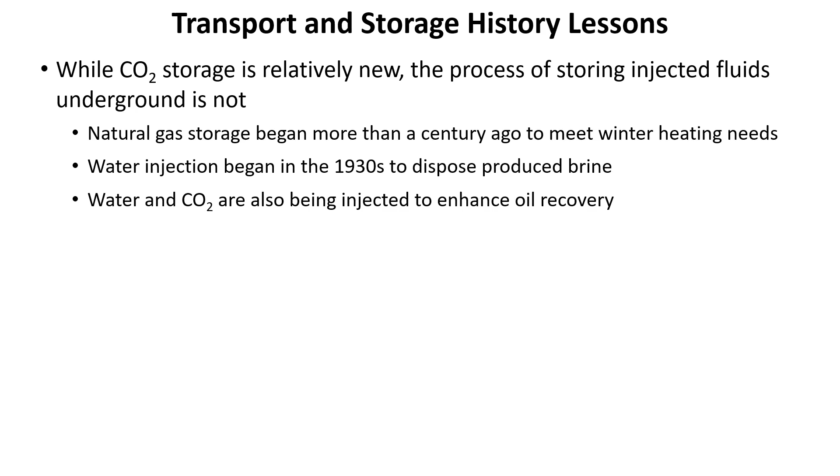While CO2 storage is relatively new, the process of storing injected fluids underground is not. Natural gas storage began more than a century ago to meet our winter heating needs, and then water injection began in the 1930s to dispose of produced water. And then we started waterflooding in the 1940s and 50s, and by the time we get to the 60s and 70s, we're injecting CO2 for enhanced oil recovery.

The history of those injection operations provides considerable insights into the types and frequencies of failure incidents. And while most are facility or wellbore related, there are a small but significant number that have to do with geological failures, generally on the order of 5% or so. And CO2 storage is susceptible to these same sorts of failures. And as we heard in the last panel session, so is hydrogen. In fact, perhaps even more so because it's less dense, less viscous, and a smaller molecular size than CO2.

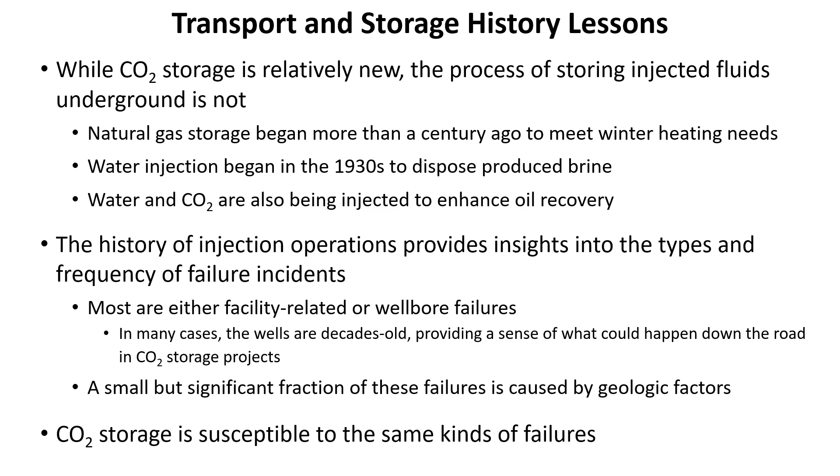And just to give us a sense of what sorts of mechanisms might be responsible for CO2 leakage, let's have a look at this diagram. You can see on the left-hand side there's a well with a red bar that goes down to the bottom, and that well penetrates limestone at the base, that's in blue, and yellow sandstone above that. And as we inject the CO2, what we find in that limestone is that the limestone grades into impermeable anhydrite to the right, and so that makes the reservoir much smaller than they thought it would be, and so it pressures up, creates fractures which breach the seal, and then that gas also moves down the faults and creates seismicity, earthquakes.

In the sandstone where the gas is being injected, or CO2 if it's supercritical, that CO2 can move through the sands and up the fractures. It could also move into more permeable pathways. It could move into old wellbores and find its way to the surface. And it may not come all the way to the surface. It may exit in shallow groundwater aquifers. So this is a nice little diagram that shows us some of these pathways of CO2 leakage that we need to consider.

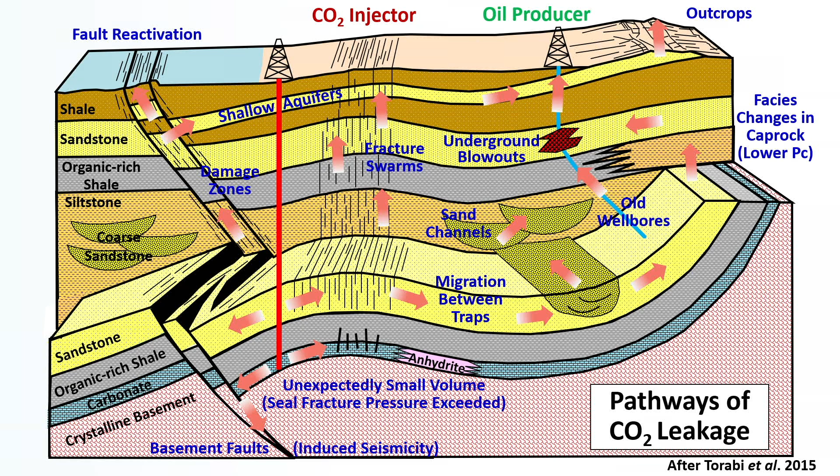When we think about risking these projects, these subsurface projects, for the chance that you'll have leakage in these different ways, we like to reference the Storage Resources Management System, which is commonly used and was developed by the Society of Petroleum Engineers along with some sister societies.

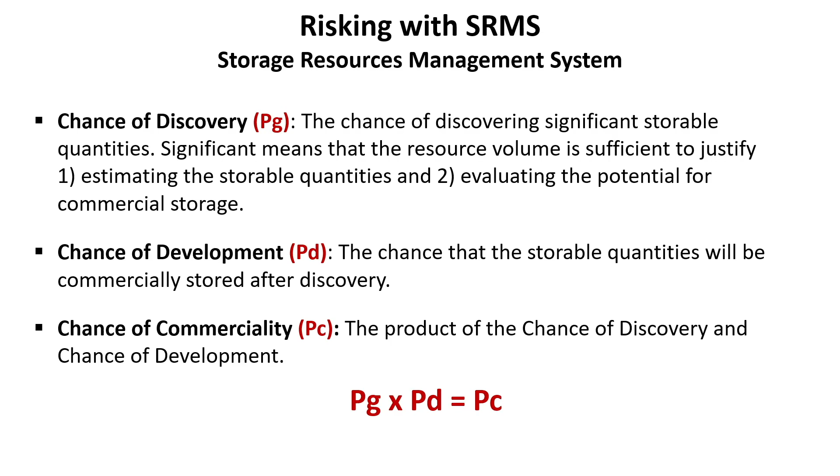And in the SRMS, we define the chance of discovery as the chance of encountering significant storable quantities in which we can put the CO2. The chance of development is the chance that those storable quantities will be commercially stored after discovery. And the product of those two is what we refer to as the chance of commerciality, using terminology from the SRMS. And if we want to estimate P sub G, the chance of discovery, and P sub D, the chance of development, we can do so with independent chance factors.

So P sub G can be estimated by considering reservoir, injectivity, containment, and trap. And you can see the key characteristics that we're looking to quantify when we do so. For each of those independent chance factors, we'll look at the subcomponents, we'll assign a value of between 0 and 1 to each of those, and then the product of those becomes P sub G. So if we thought there was a 90% chance of each of those four, we would multiply those together, and we would have a P sub G of 66%.

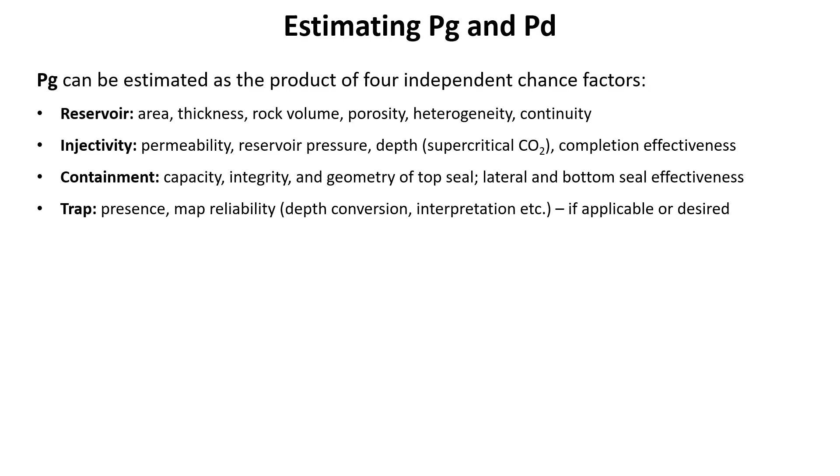Similarly, we will do something like that for the chance of development success. And again, this would be applied after you have the discovery. There's the chance that your plan is going to be technically mature and executable, that you're going to be able to inject longer term at rates that can put away the contracted volume, and that your facilities are in place and that you are in compliance. And again, we assign values of 0 to 1 to each of these, multiply them together, and the product becomes P sub D.

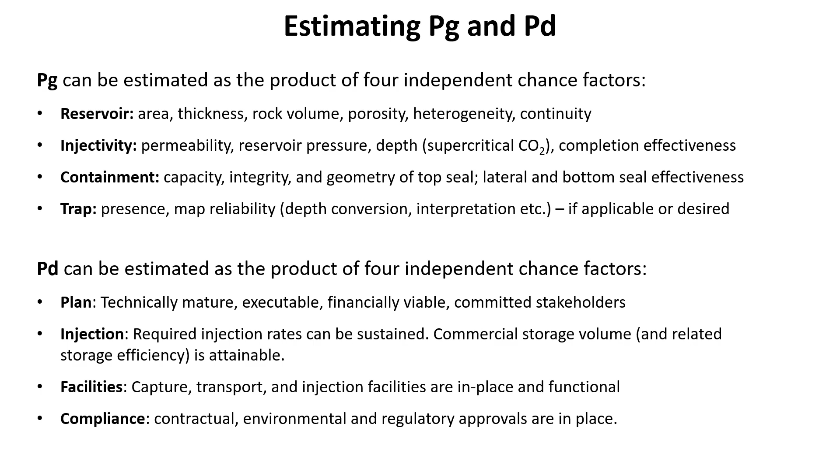And in addition to thinking about P sub G and P sub D in this way, which is consistent with the storage resources management system, we can think about P sub G and P sub D in terms of current and future risks. So for P sub G, we would call that a current risk because we can go out there and we can quantify whether or not we have a discovery by drilling a well. We'll log the well, we'll take some core, we'll do an injectivity test, and if we're able to convince ourselves that we then have the potential for commercial success, we can go ahead and inject longer term, see if we can store those quantities that we have contracted, and then also ensure over time that we can maintain the ability to inject through following regulatory rules and having a social contract with the public.

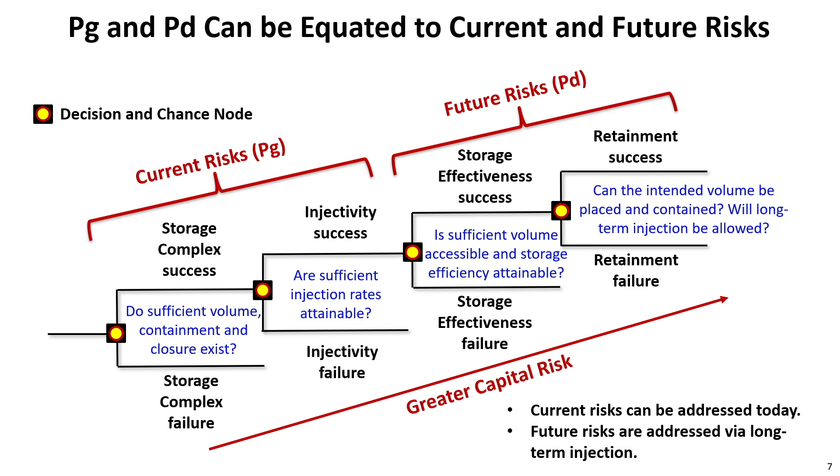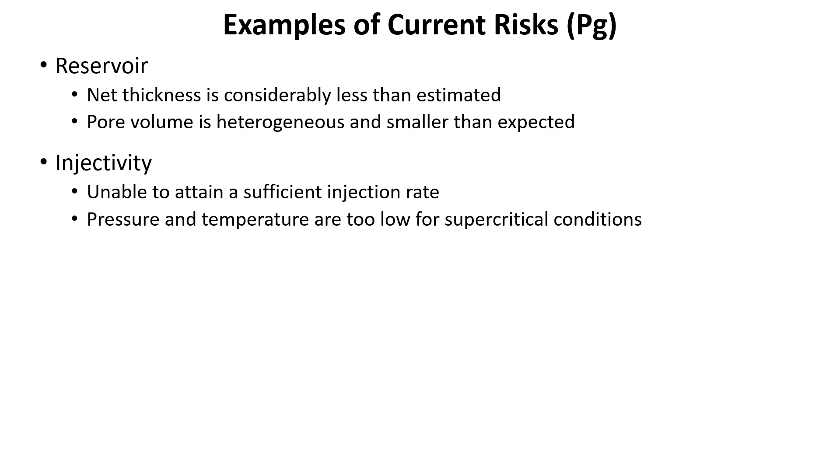Now, to talk a little bit more about these current and future risks, let's look at some examples here of current risks under each of these subcomponents. Reservoir risk, for example, might be that your thickness isn't sufficient or that your pore volume is smaller than expected. Your injectivity means that you're unable to attain a sufficient injection rate, or perhaps your pressure and temperature are too low for the supercritical conditions you need to store the contracted mass.

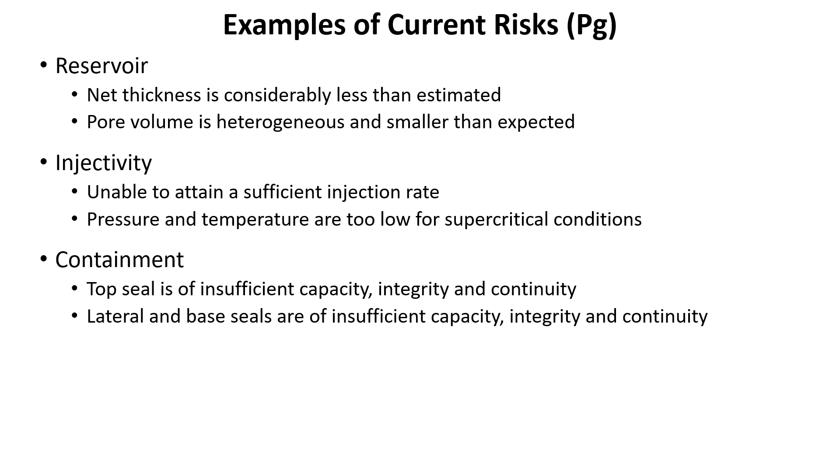You want sufficient containment, which means top seals, lateral and base seals that exhibit capacity, integrity, and continuity. And then finally, if you have a trap, you need to understand what the size of the trap is, whether it's big enough, and whether you have compartmentalization within the trap. So these are some examples of these independent chance factors that we would have to think about when risking this for P sub G.

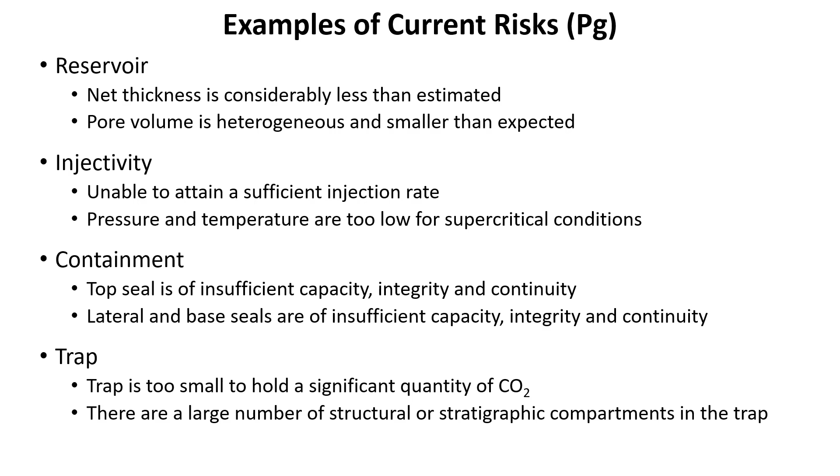And an example of a project that actually failed to get past the current risk stage, we could consider the ZeroGen project in Australia, where, as you can see here, they had at least 4 tests of the interval of interest. And each of those tests have a KH value, that's permeability thickness, which is a proxy for injectivity, that were somewhere between about 6 and 30% of what was estimated from core plugs. So that's too low to have a chance of commercial success. And therefore, this project fails, Pg is not one, and you exit from the project.

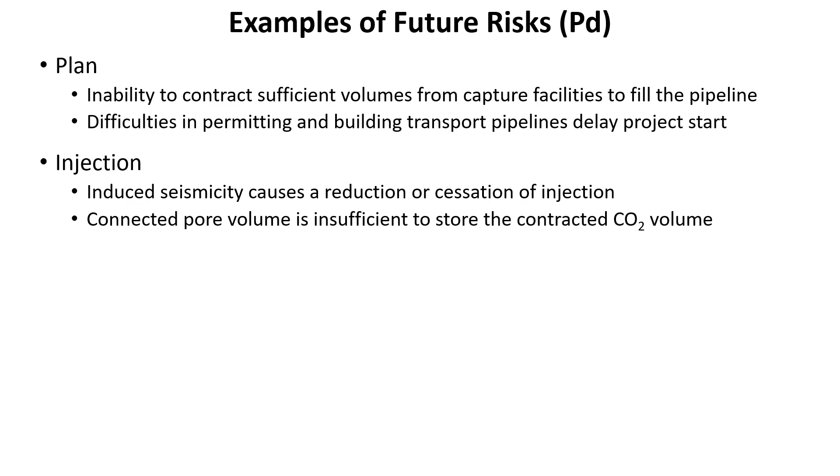If we talk about examples of future risks, so this is the chance of development, for our plan, the inability to contract sufficient volumes or difficulties in permitting and building the transport pipelines would mean that you have a failure of the plan. For the injection component here, induced seismicity could cause a cessation of injection, and you may not have sufficient volume to actually store that CO2 that you inject.

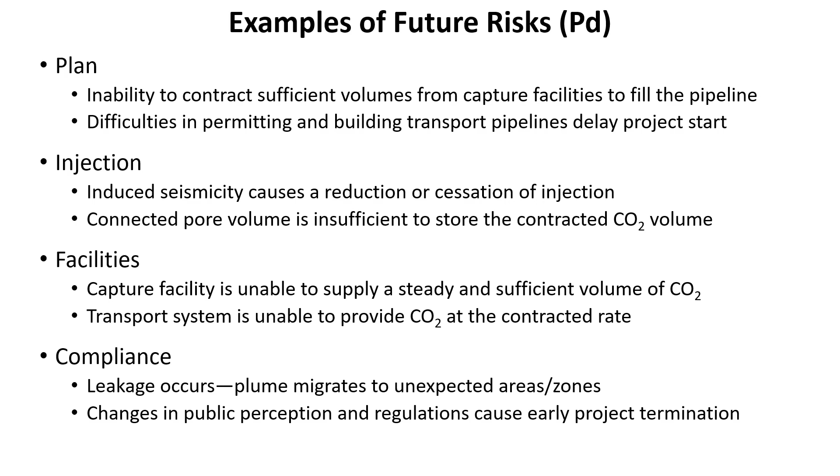For the facilities, you may not be able to supply that steady and sufficient volume of CO2 that you need at the contracted rate. And in terms of compliance, perhaps you have leakage or the plume migrates somewhere it's not supposed to, changing the public perception and causing the regulators to pull your permit. So these are the sorts of things we worry about after we have a geologic success and we're trying to assess the chance of development.

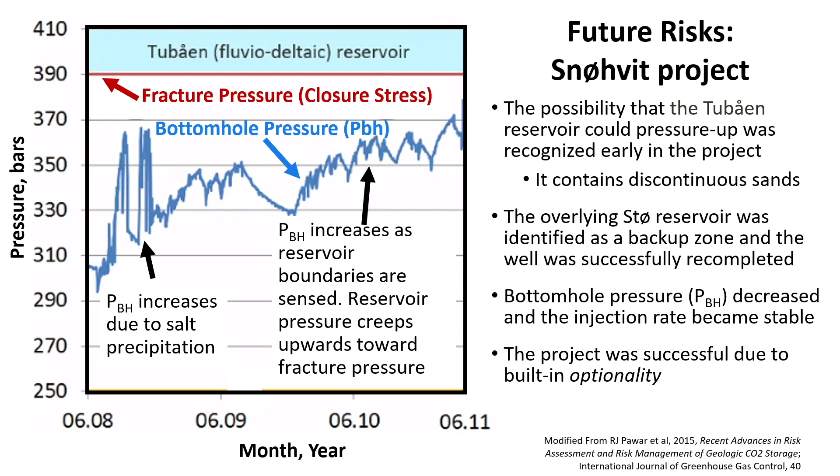So as it got close to the red line there, they recompleted the well into the overlying Stø Reservoir, which had previously been identified as a backup zone, successfully recompleted it, decreased the bottom hole pressure, and the project was successful and could continue with development. And it was successful due to built-in optionality. And that's an important term to understand because we want in our projects to have optionality, things that we can do if we have potential for failure. And this is a good example of that.

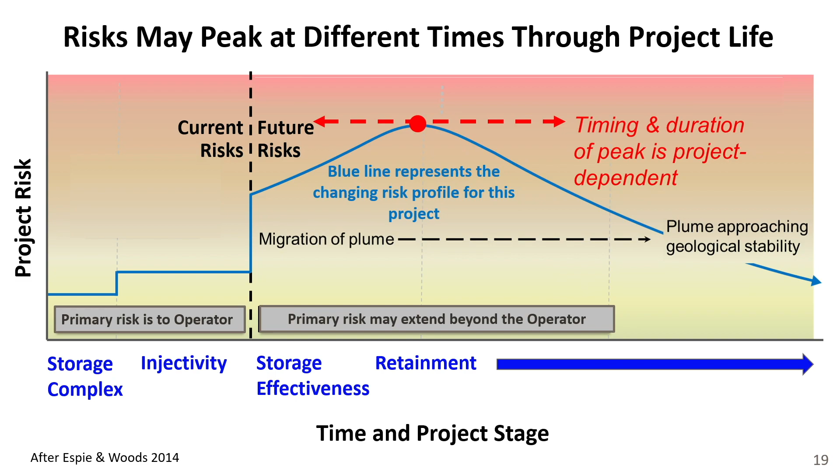But during that period, it is possible for that CO2 to migrate somewhere it's not supposed to. So there could be a peak risk later on in the project past the point at which you finish injecting. So this points to the fact that we have various times along the project length in which we may have these different peak risks, and we need to be able to identify them, anticipate them, and mitigate against them. And that's what we're going to talk about now. We're going to talk about a couple of the ways we can reduce risk.

I have a list here we'll go through very quickly. These are some of the ways in our company we try to help clients reduce risk. And those include framing sessions where we can identify key uncertainties, risks, and mitigation options. Quantifying the value of information we need to gather to understand these reservoirs. Building a library of analogs, including proposed projects for which a lot of data may have been obtained.

Building models of sufficient complexity to assess risks and actually running failure cases so that we understand under what circumstances the project could fail. Using the staged approach, which I talked about a few minutes ago. Determining that range of possible outcomes and keeping your ranges wide, particularly if you don't have a lot of information. Effectively communicating your intentions and keeping everyone on board. Recognizing and mitigating your biases.

As human beings, we are plagued by bias, particularly things like overconfidence, which cause us to narrow the range of possible outcomes, and overoptimism, which causes us to choose a high value within that narrow range. And then there's also other biases, including the confirmation bias, where we collect and interpret data in a way that confirms our beliefs, or the motivational bias, which leads us to act in ways based on our personal desire for a given outcome.

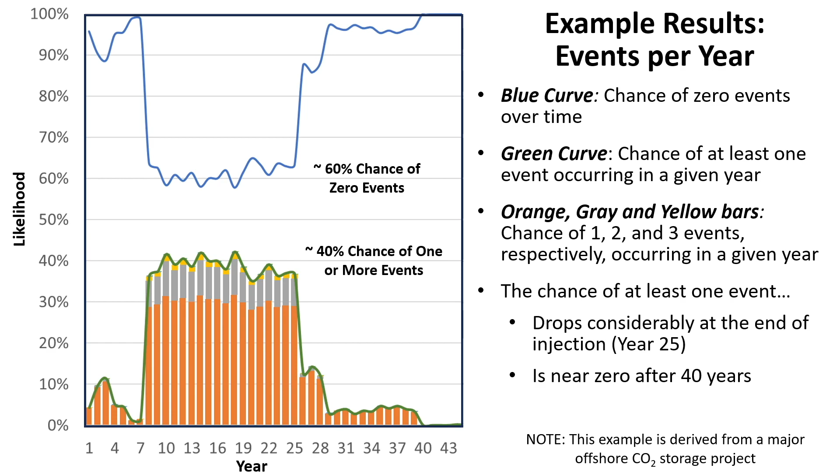So this is the idea, to try to give people a sense of when these events might occur, what might be the financial impact associated with them, so it is on their radar. And some of these you'll want to mitigate, others it's pretty difficult to mitigate for a 1 in 1,000 year event, but at least you should understand that it's possible.

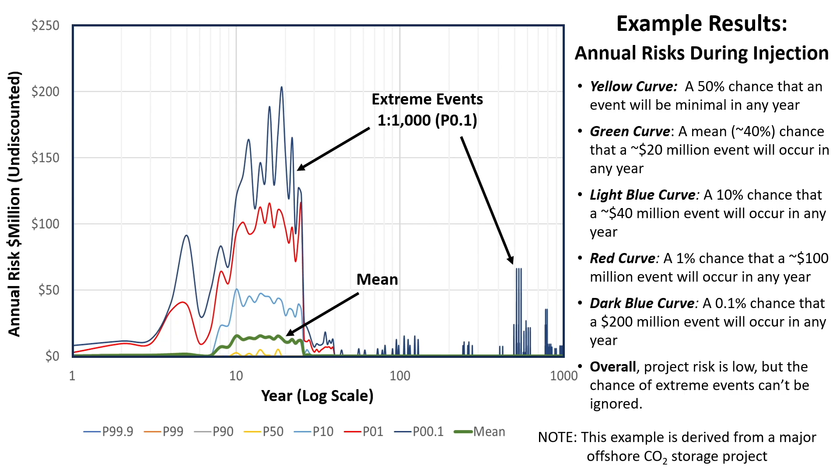Okay, to summarize then, CO2 transport and storage are susceptible to multiple risks, as revealed by the history of subsurface injection projects. We can quantify them in SRMS as PG and PoD, and those become current risks and future risks in our risking model. Those current risks can be addressed today, the future risks addressed by longer-term injection. Those risks are not constant through project life, and they may peak at different times due to various factors.

There are many ways to reduce risk, as I walked you through that list, and a risking tool like I showed you here can facilitate a quantitative understanding of risk over project life, including the number of events per year and their potential financial impact. And in quantifying risks, the adverse events can be foreseen and mitigated, or at least we hope so, which will minimize some of the financial exposure and hopefully maximize the chance of project success. And I'll close by saying those risk assessments need to be calibrated to analogous CO2 storage projects. We don't have very many of those at present, so the assessments will improve with time as more projects are implemented. So that's what I have for you this afternoon.